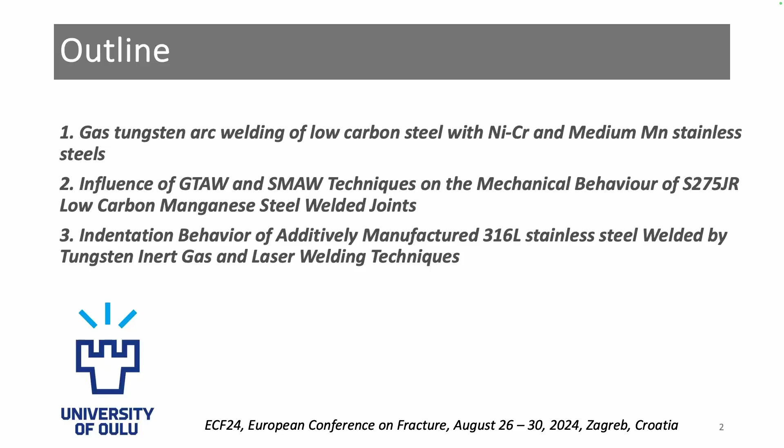This is the outline. The first topic is about gas tungsten arc welding of low carbon steel with nickel chrome and medium manganese steel. The second topic is about the influence of GTAW and SMAW techniques on weldability of low carbon manganese steel. The third is about the indentation behavior of additively manufactured 316 stainless steel, whether by laser or TIG techniques.

The first topic concerns medium manganese stainless steel welding with nickel chrome stainless steel and low carbon steel.

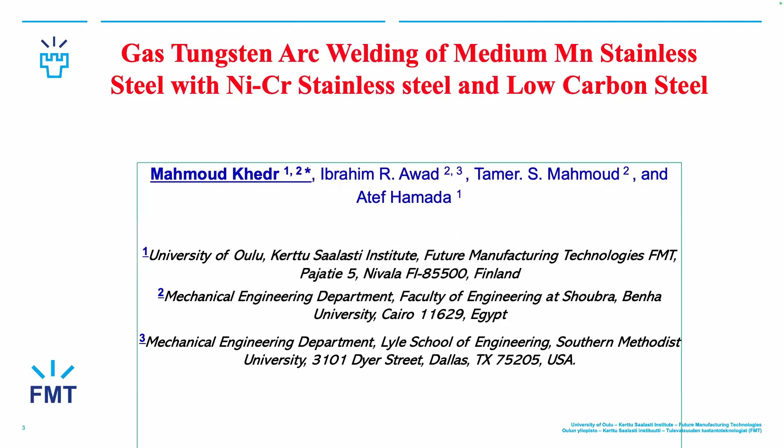Background on this topic: the 300 series stainless steel is widely used, but for economic reasons there is a direction toward replacing it with the 200 series. Nickel chrome stainless steel, a type of 300 series, will be replaced with medium manganese stainless steel, a type of 200 series. We explored the weldability of medium manganese stainless steel with low carbon steel and nickel chrome stainless steel. Welding was performed at different heat inputs.

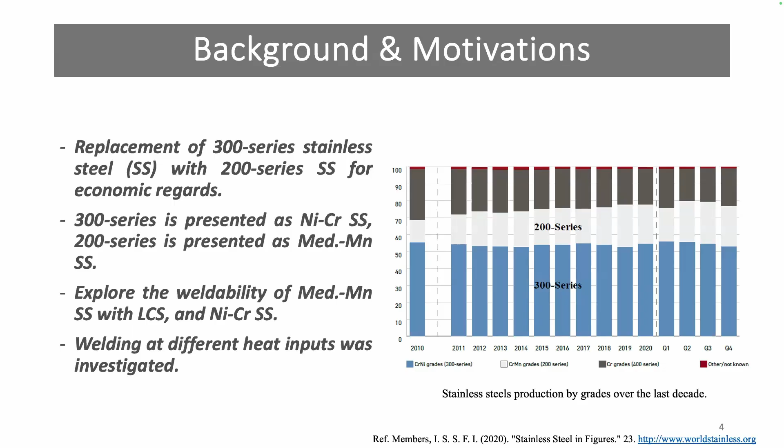Here is the chemical composition of the investigated materials. The nickel chrome stainless steel has about 18% chromium and 7.8% nickel. For the medium manganese stainless steel, chromium and nickel were reduced while manganese was increased to keep more region for austenite.

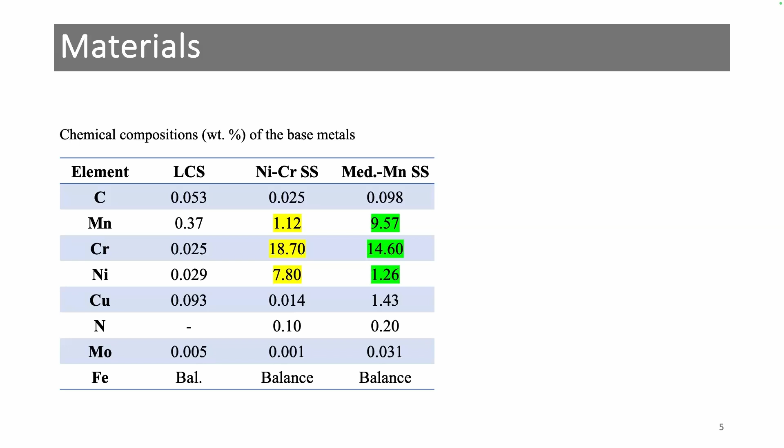The methodology used the GTAW technique. The plates were 200 mm by 100 mm with a thickness of 2 mm. Joint type was butt joint, and the shielding gas was pure argon. We obtained specimens for microstructure, hardness, and tension tests. We used two different filler metals; the filler with molybdenum was used for welding low carbon steel with manganese steel to give a chance for carbide precipitates at the fusion zone, increasing joint efficiency.

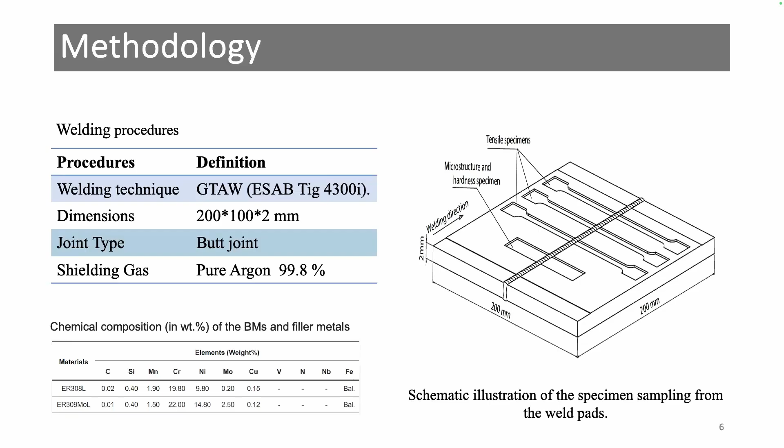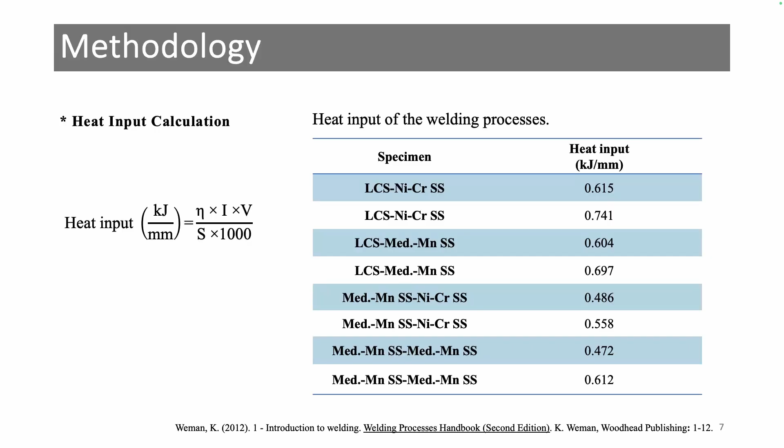The heat input was calculated using this equation, considering current, voltage, welding speed, and process efficiency. These are the heat inputs investigated in this study.

For results and discussion, the low carbon steel has a BCC structure with ferrite and pearlite, while the nickel chrome and medium manganese steel have fully austenitic structure, as seen by optical and SEM.

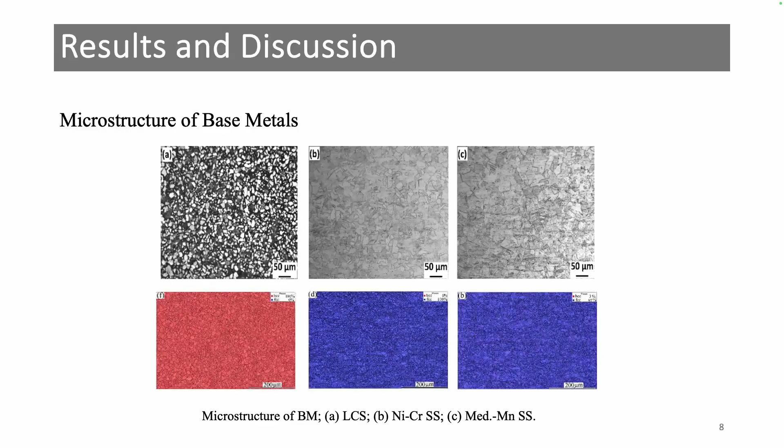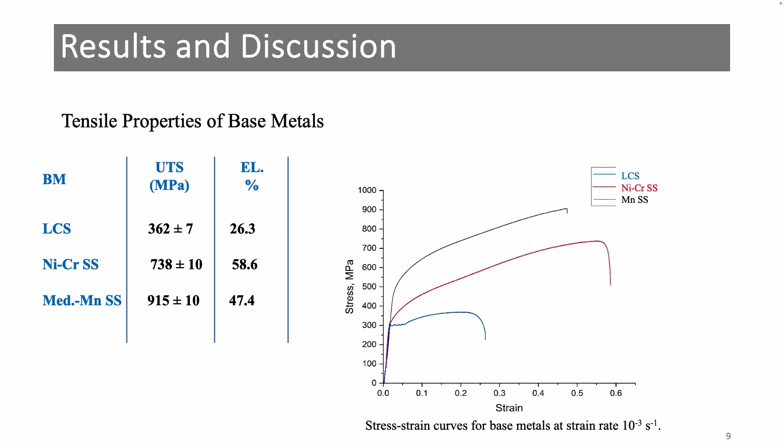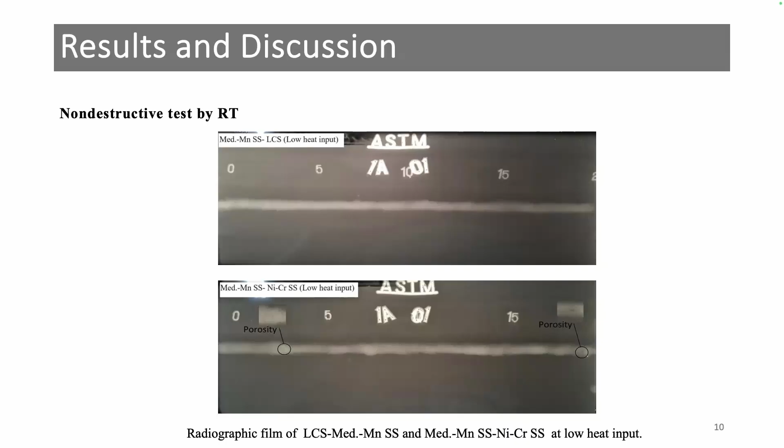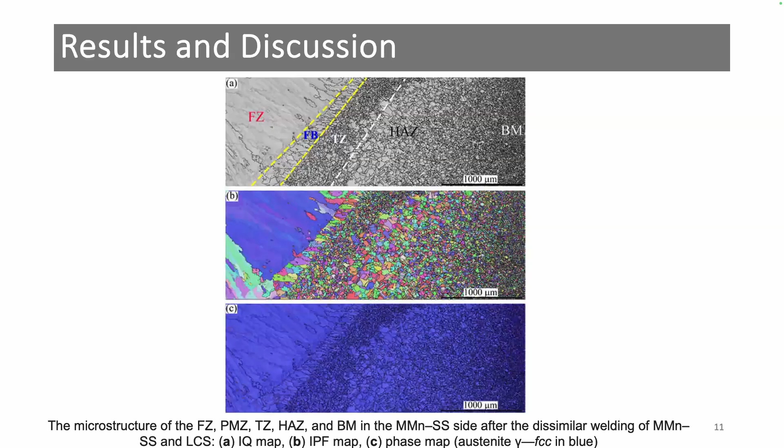On the medium manganese stainless steel side, we found a transition zone between the base metal and fusion zone, occurring due to sensitization where chromium and carbon are depleted from the grain to form carbides at grain boundaries. This transition zone was also noticed on the nickel chrome stainless steel side. For the low carbon steel, there was only grain coarsening in the heat affected zone.

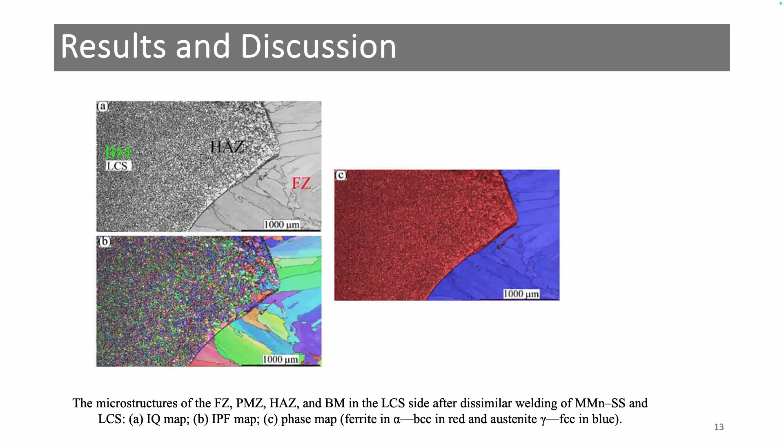The main study concerned the amount of delta ferrite at different heat inputs. The higher heat input is shown in red, the lower in black. With increasing heat input, the amount of delta ferrite decreased, as calculated using a ferrite scope.

With higher heat input, the fusion pool increases and the cooling time for the fusion pool increases. Therefore, at higher heat inputs, the amount of delta ferrite decreases, because some of it transforms into austenite.

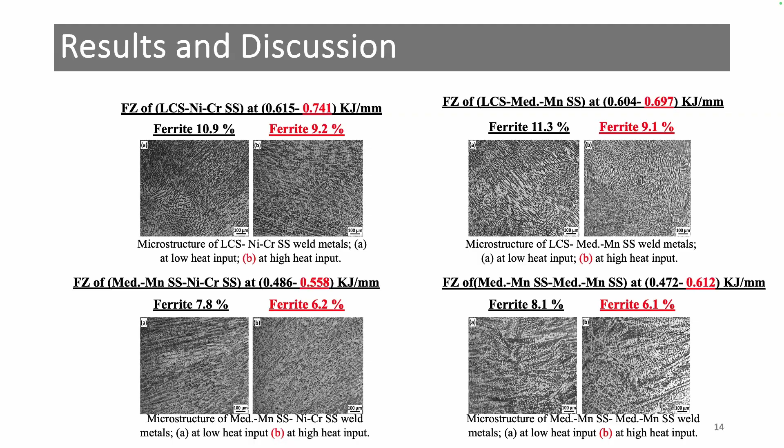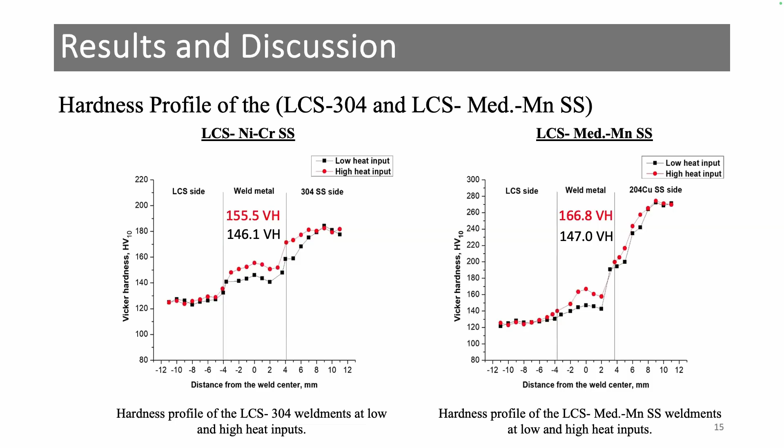Regarding hardness results, in the low carbon steel side at the fusion zone, hardness increased with heat input increase. However, in the medium manganese steel with nickel chrome stainless steel, hardness decreased with heat input increase, due to formation of wider arms of the dendritic structure of austenite and ferrite dual phase in the fusion zone.

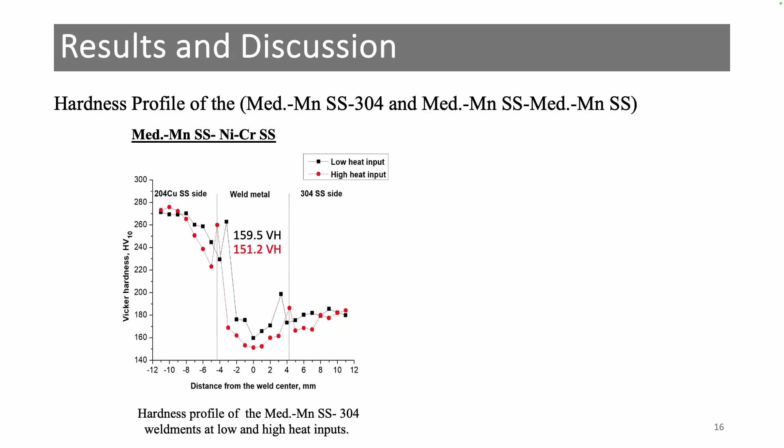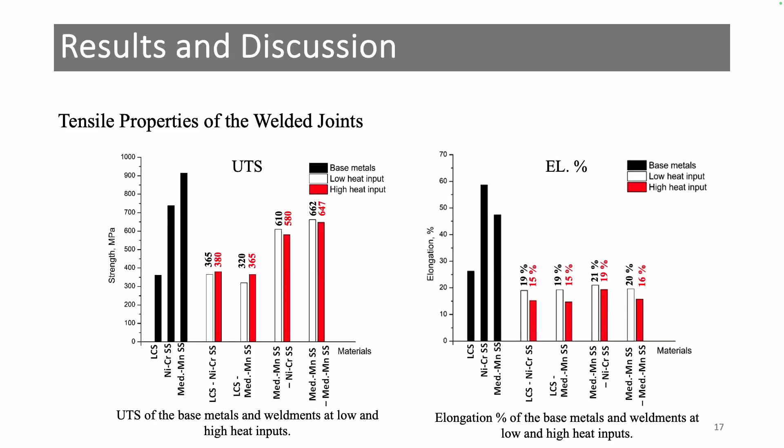Here are the tensile properties of the welded joints. For the low carbon steel joints, joint efficiency increased with heat input increase. However, in the stainless steel joints, there was a reduction in strength with heat input increase.

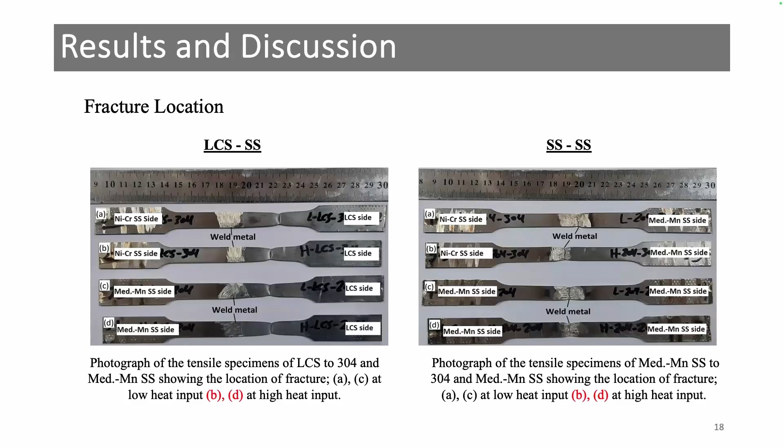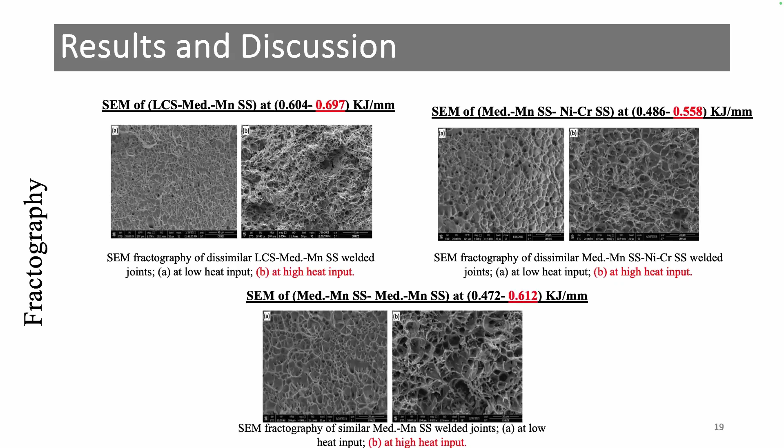Here is the fracture location. In the low carbon steel welded joints, fracture happened at the low carbon steel side. In the stainless steel joints, fracture happened at the weld zone, meaning the weld zone had lower strength than the base metals. Regarding fracture surface, there was no big difference; most specimens showed ductile fracture.

In conclusion, the fusion zone showed a duplex structure of austenite and delta ferrite. Delta ferrite content decreased with increasing heat input, while the width of the fusion zone and heat affected zone increased with heat input. Hardness increased with heat input for the low carbon steel joints, but decreased with heat input for the stainless steel joints, and dimpled features were promoted in all fractured joints.

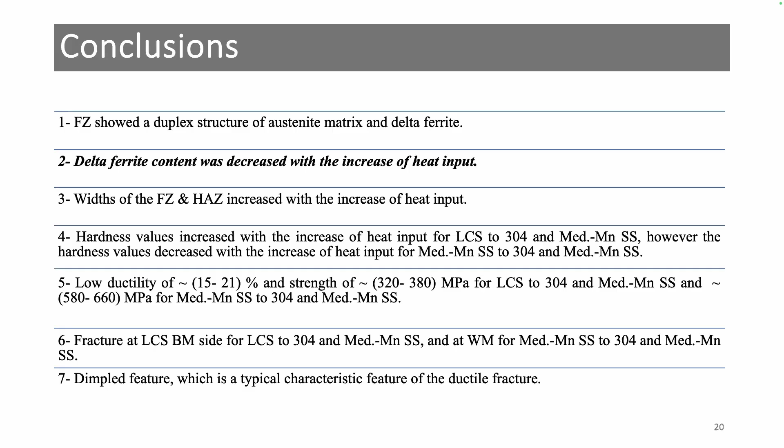That's all. For more information about this study, it was published last year. Thank you.